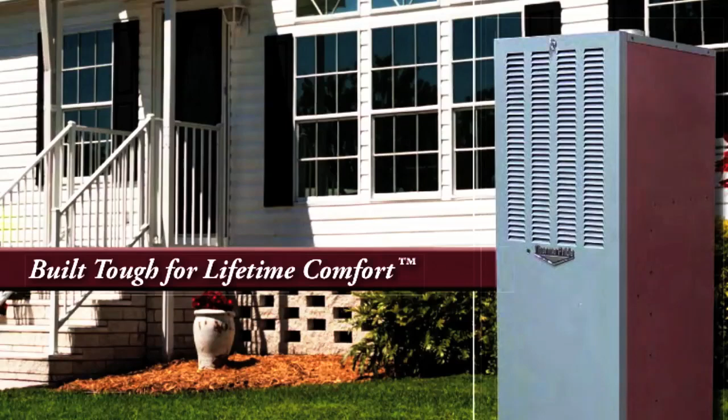Today we are installing a Thermo Pride OME series oil furnace in a mobile home application.

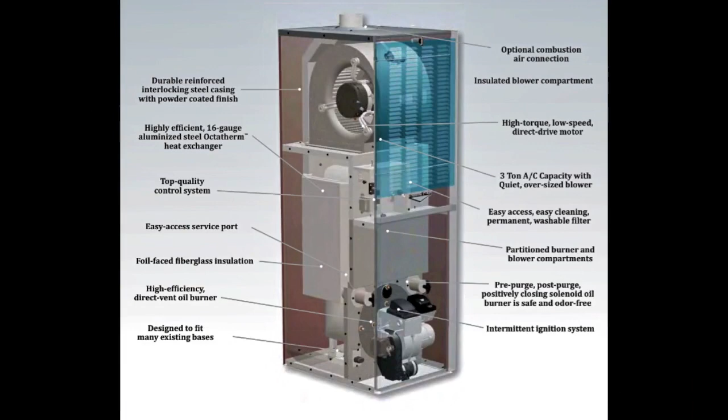The OME series oil furnace is yet another example of Thermo Pride's commitment to crafting only the highest quality products. A heavy 16-gauge Octatherm heat exchanger equipped with easy access service ports for cleaning is housed inside a durable, reinforced, interlocking steel cabinet.

This furnace is equipped with a Beckett AFG burner and has an 86% AFUE rating.

Like all of our mobile home furnaces, the OME series furnace comes with a peace of mind warranty, providing a 10-year warranty on parts and a lifetime warranty on our heat exchangers. Plus, our heat exchangers are the industry's only non-prorated and automatically transferred warranty to new homeowners.

We are going to be replacing a Miller CMF80 furnace today. The CMF80 is 57 inches tall and 18 inches wide, just like the OME series. The OME series is 24 3/4 inches deep, 1/2 inch deeper than the CMF80.

For this application we will be installing a coil box, but it is important to note that because the CMF80 does not have a 4-inch combustible base, our 70 base would be required in this application if we were not installing a coil cabinet.

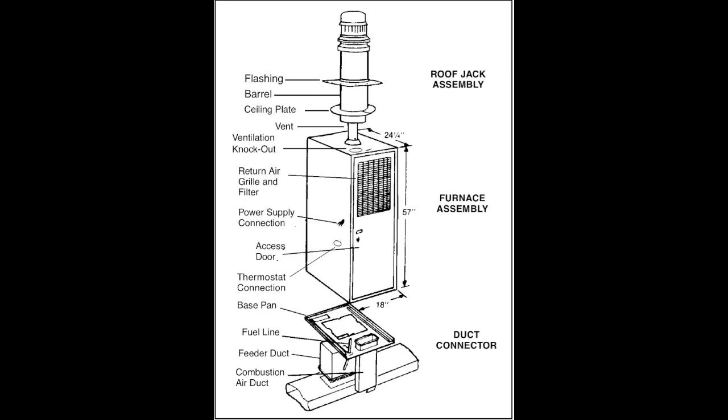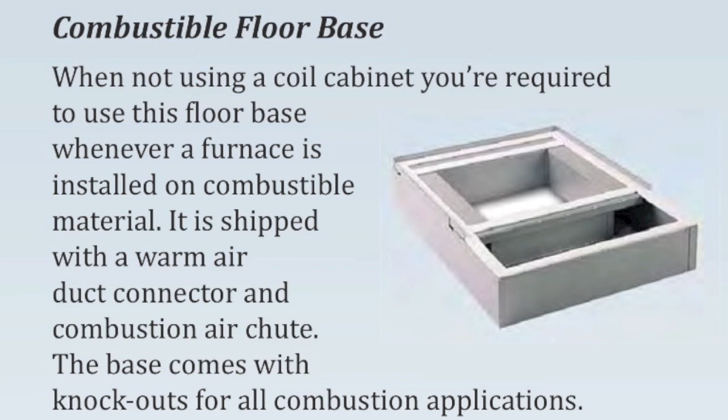Our 70 base is a 4-inch floor base, which can be used with all of our mobile home furnaces. It ships with a warm air duct connector and a combustion air chute. This base is required whenever a furnace is installed on combustible material.

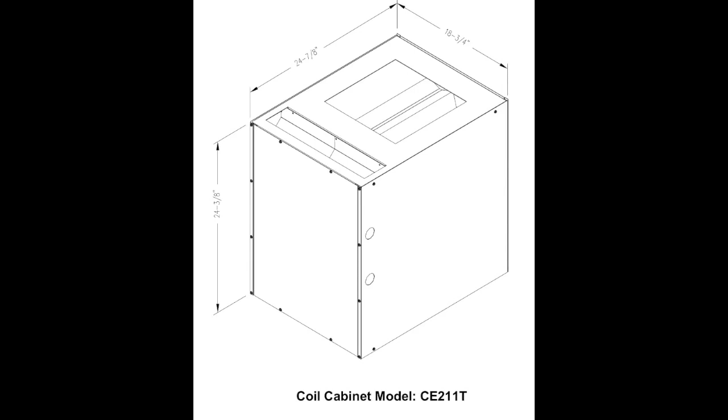We offer 2 coil cabinets for matching to our OME series oil furnaces. Our CE111S is our 20-inch tall coil box, which we will be using today. Our CE211T is our larger coil box and measures 24 3/8 inches tall. It is important to reference these heights when surveying a project. In this application, our 24 3/8 inch tall coil box would not have fit.

There are 0 clearances required from the back and sides of the furnace and 1 inch from the top. A 6-inch clearance is needed from the front of the furnace when in a closet, and 18 inches is needed when in an alcove application. These clearances can be referenced in the installation manual.

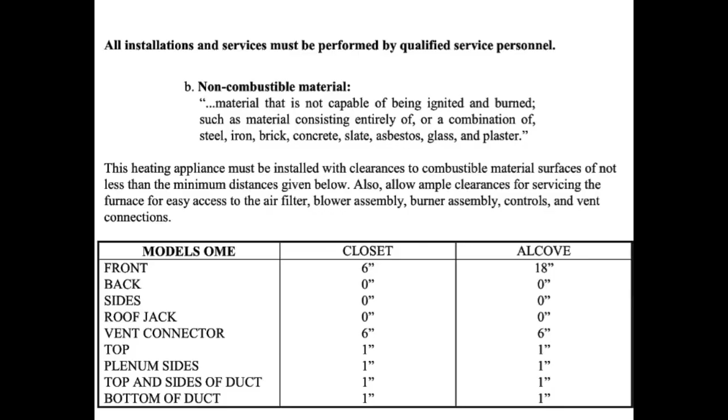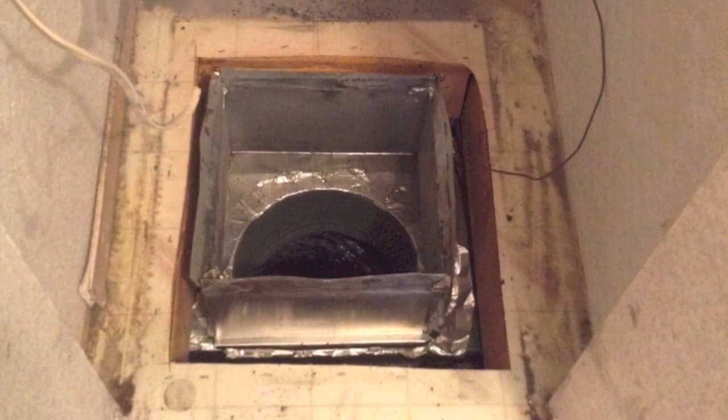Once the furnace is removed, the CMF80 floor base can be removed. We now need to position the floor base to ensure that the flue pipe lines up correctly with the furnace. These measurements are available in our installation manual to help with this process.

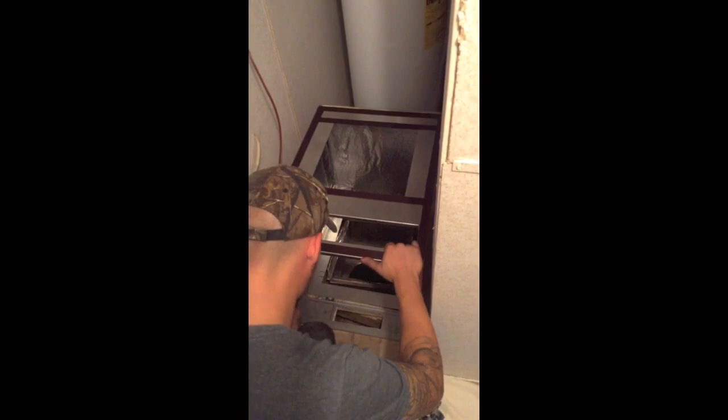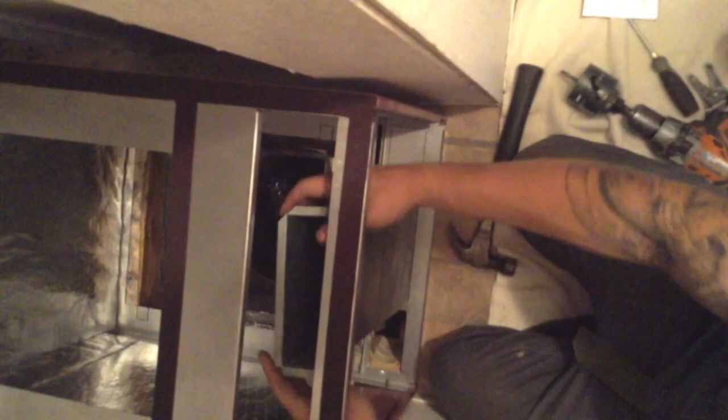Once the positioning for the coil cabinet is determined, you can use the knockouts located inside the coil cabinet to mark your openings needed for the combustion air chute, as well as for the refrigerant and condensate lines. After making these openings, you can then set your coil cabinet and reinstall the combustion air chute.

Make sure that the combustion air chute is not blocked in any way when pulling combustion air from under the home. A transition boot can also be added and ducted from under the home with either galvanized or PVC pipe.

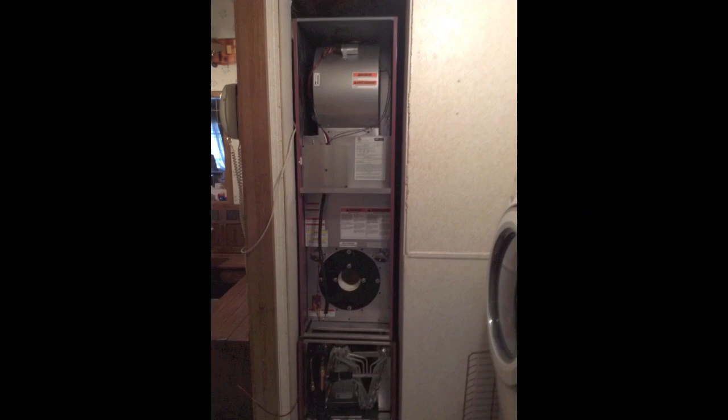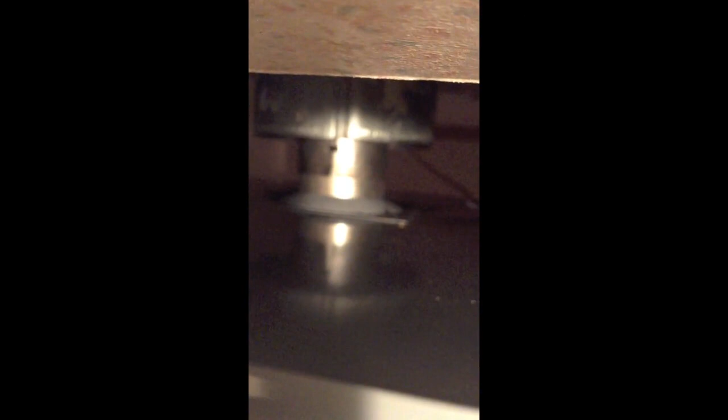Now we can set the furnace on the coil cabinet. You can see that this lined up nicely to the existing roof jack, but because there is such limited space, we will need to connect the flue pipe by removing the cap from the roof jack and tapping the flue pipe downward onto the furnace flue connection. A seamless flexible flue offset is also available for applications where the additional needed space is available.

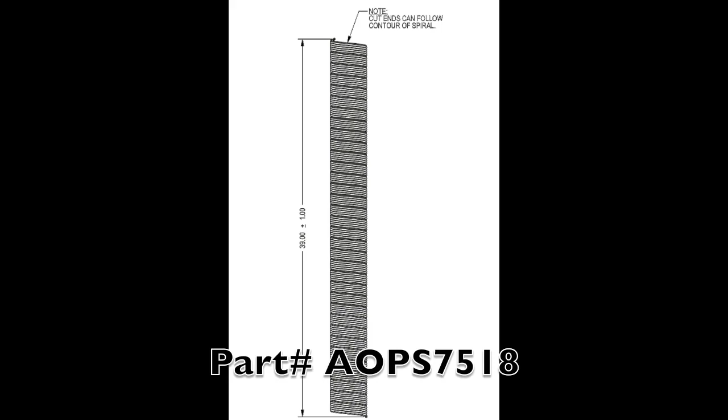Now that the furnace is in place, we want to ensure that the plenum is properly sealed. We can now install the coil.

Now it is time to install the burner. Because this is a 2-pipe application, we will need to install the bypass plug which comes with the burner. When installing the burner, properly align the burner mounting plate gasket, then bolt the burner to the burner plate.

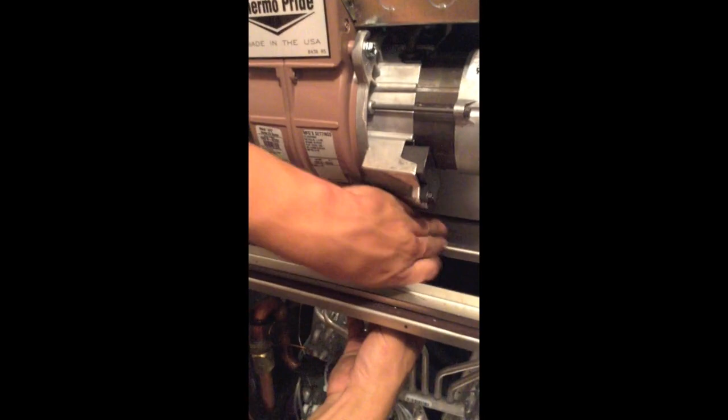With the burner mounted, we can now connect our combustion air kit to the combustion air housing on the burner, and to the combustion air chute, by installing the 2-inch radiator hose over the street side of the PVC Street 90. The other end will attach to the burner housing and can be secured using the 2-inch hose clamps. The flexible hose will then be installed over the PVC 90 to the provided floor boot.

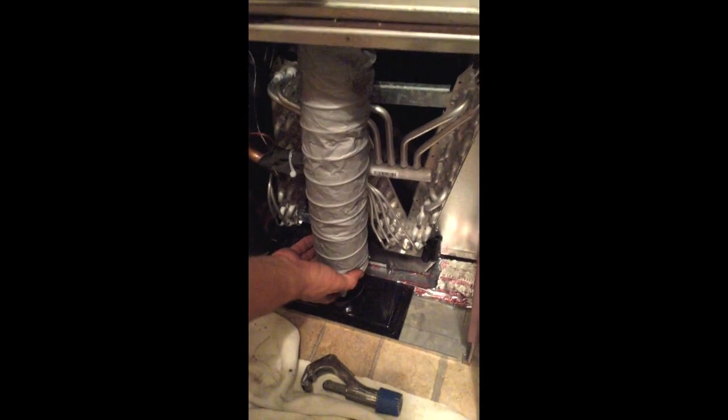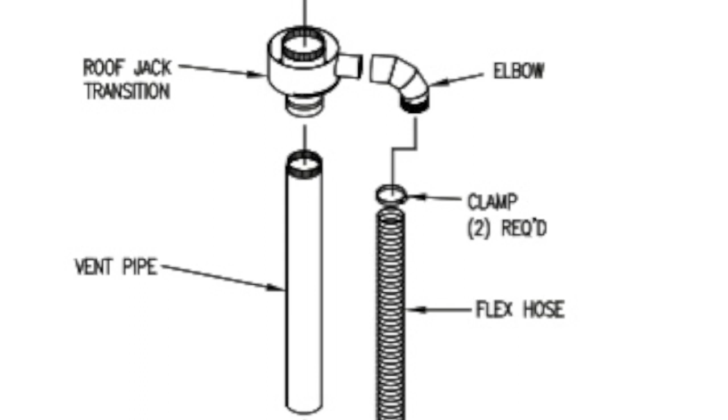A combustion air kit is also available for applications where an existing concentric roof jack is used and you would like to adapt to it. Otherwise, you may choose to use the air chute to bring combustion air into the burner from under the home as previously discussed. The combustion air kit includes a roof jack transition that will adapt to the existing concentric roof jack. The kit also includes materials needed to attach the steel combustion air pipe, which can be installed by removing the rear panel of the furnace.

You will also need to remove the knockouts in the top trim panel and the blower trim panel as well.

The electrical compartment housing all the low and line voltage connections is located at the top left side of the furnace. When making these connections, always ensure that you are in compliance with your local and national electrical codes.

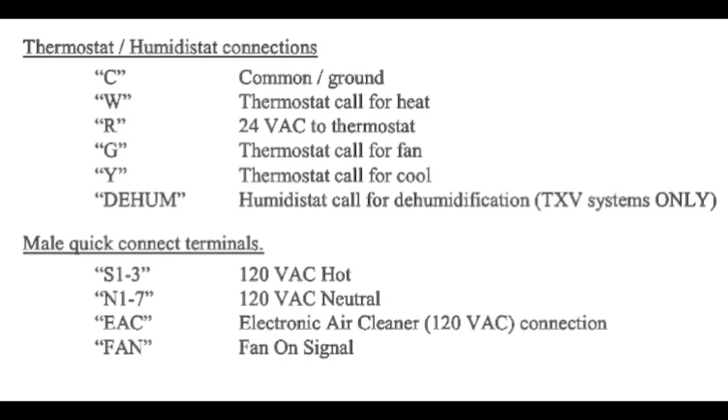4 LED lights are provided for the low voltage terminal connections and will operate whenever a call is present. The control system provides 120 volt outputs for both the humidifier and the electronic air cleaner as well. This control system also provides a dehumidification mode that can be utilized when using a thermostat that has dehumidification capabilities.

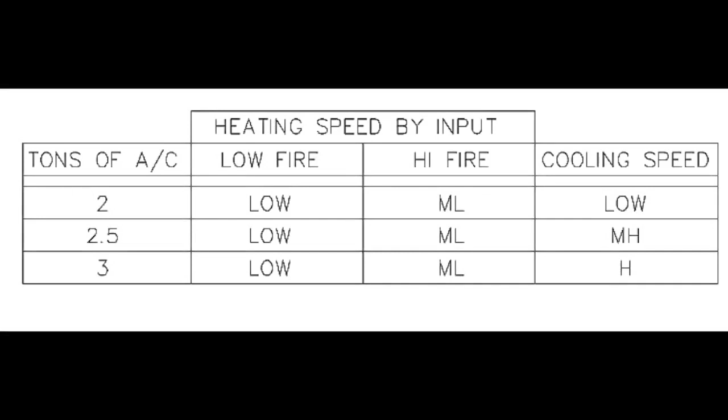A fan speed selection chart is in our installation manual to show you which fan speed is designated for air conditioning based on nominal tonnage. Dip switches are also available to adjust the blower on and off delay times.

The OME72 can be fired at 2 different firing rates by changing the nozzle size. Once the preferred firing rate is determined, ensure the combustion parameters are within tolerance using an accurate and calibrated instrument, as specified in the installation manual.

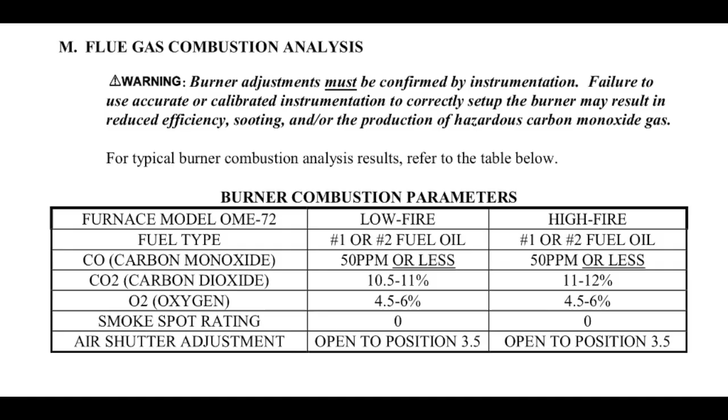This concludes our installation and training video for our OME series oil furnace. Thank you for watching.